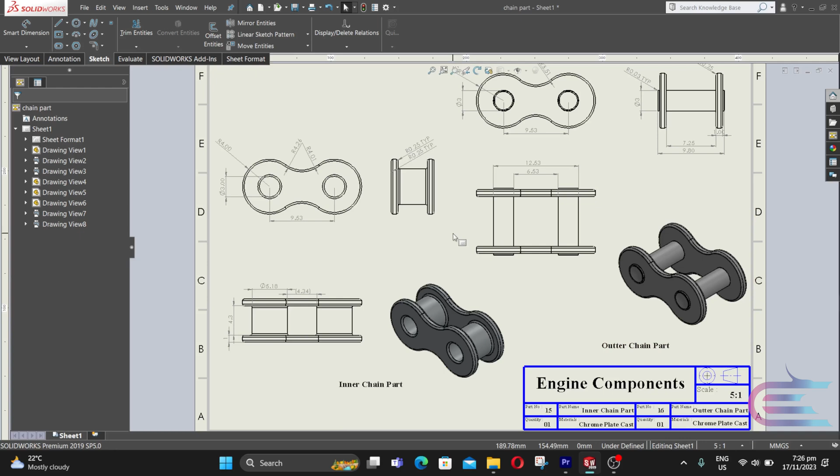In this tutorial, we are going to assemble the power transmission components.

From File, select New, then Part, then click OK. Right-click over the front plane and select Normal to. Right-click again and select Sketch.

Click on Circle. Beside the origin point, draw a circle. From the same center, draw another circle. Select Center Line, and from the origin, draw a vertical center line.

Select Smart Dimension. This diameter is 3 mm, and this one is 8 mm.

The distance from the origin to center is 4.7625 mm.

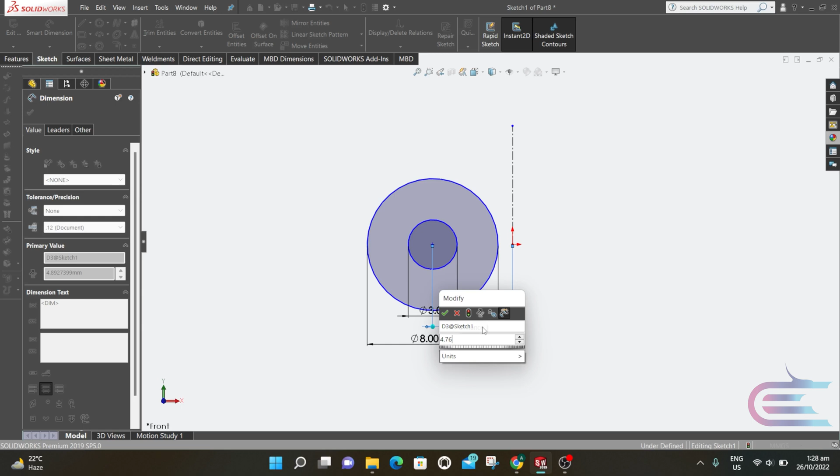Click OK. Select Mirror, select these two circles, and mirror about the center line.

Click OK. Now select Arc, connect these two circles, and place the arc as a concave form.

Press Ctrl and select the arc and this circle, then select Tangent. Click OK. Similarly for these two also.

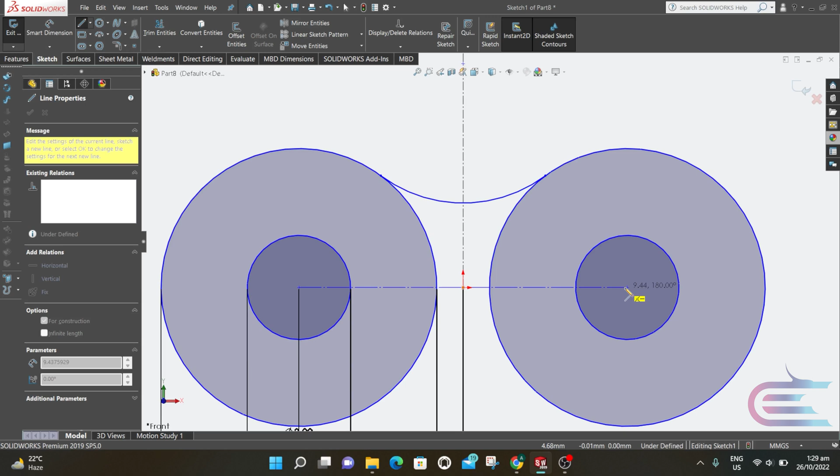Create a center line connecting the center of these two circles. Click Mirror, select this arc, then mirror about the center line. Click OK. Now trim out the extra portions.

Click OK. From Features, select Extrude. Extrude 1 mm. Then click OK.

Right click on this surface and select Sketch. Now place it Normal to.

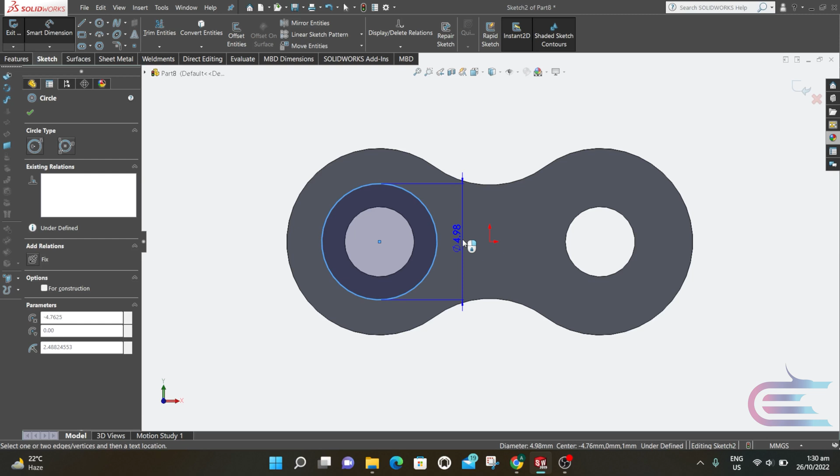Select Circle and from the center draw a circle. Select Smart Dimension, and the diameter is 5.182 mm.

Click OK. Now go to Features and Extrude. We need the hole to be throughout, so first select Convert Entities and select this edge.

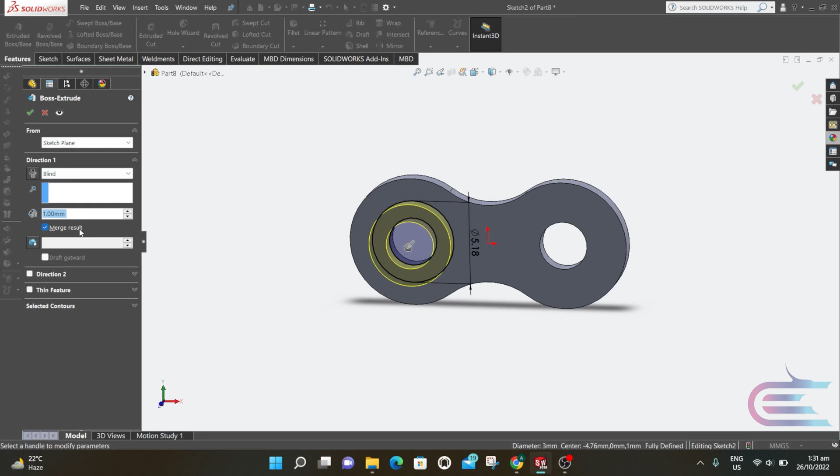Click OK. Now go to Features, select Extrude, and extrude 4.3 mm. Then click OK.

Now select Mirror and select the right plane, and select this feature. Click OK. Select Reference, then Plane. Select this surface and this surface. Then click OK.

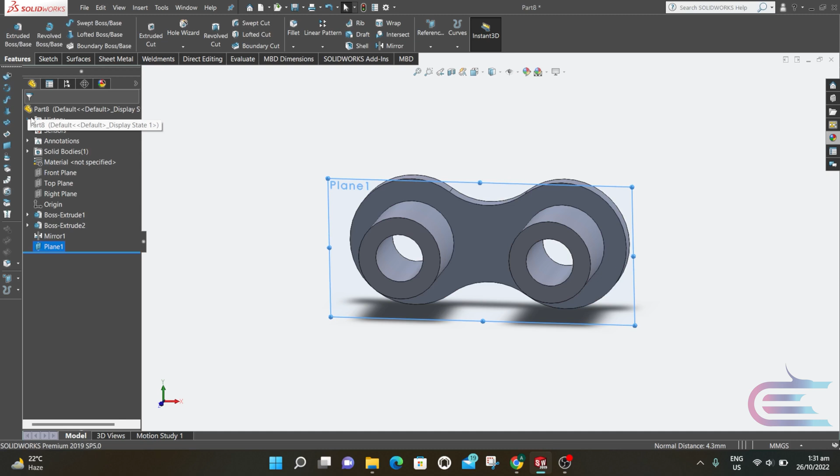Now go to Mirror, the plane is already selected. Select this feature. Then click OK.

Now we will add some fillet on the edge. First hide the plane. Click on Fillet and select this edge. Using the fillet expert window, select all of the edges.

Now the fillet radius is 0.25 mm. Then click on Apply.

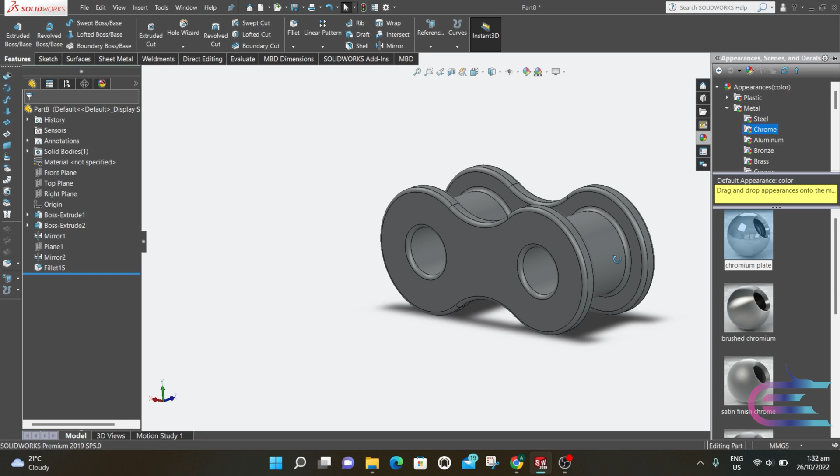Now go to Appearance and select chromium plate. From File, select Save As, chain inner part.

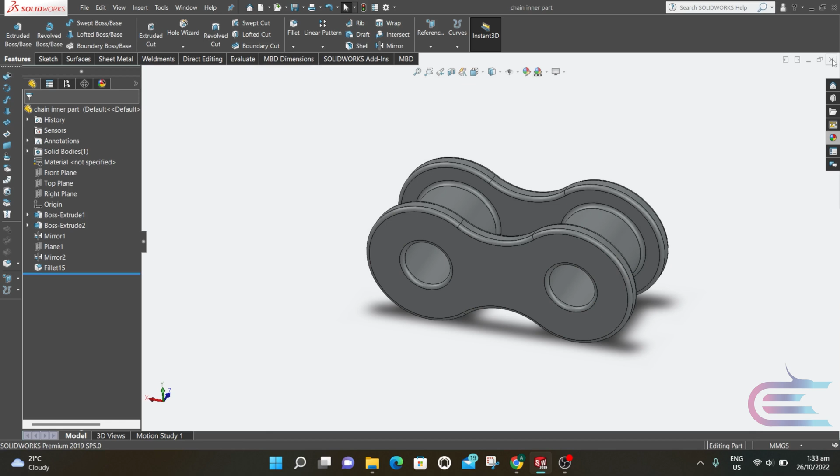Now we will create the outer part of the chain, and this is the drawing of it.

From File, select New, then Part, then click OK. Right click over the front plane and select Normal. Right click again and select Sketch, select Circle.

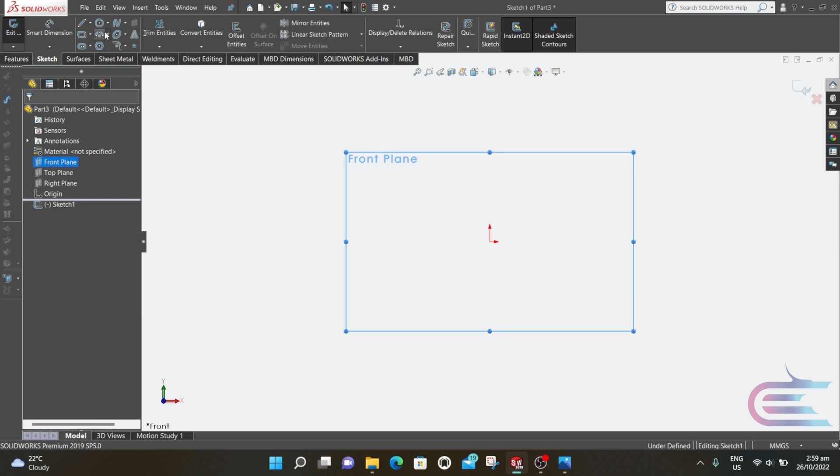Beside the origin point, draw a circle. From the same center, draw another circle. Select Center Line, connect the center of the circle and origin point, and draw a vertical center line.

Now select Smart Dimension, and the inner diameter is 3 mm, and the outer diameter is 8 mm.

And this distance is 4.7625 mm. Then click OK.

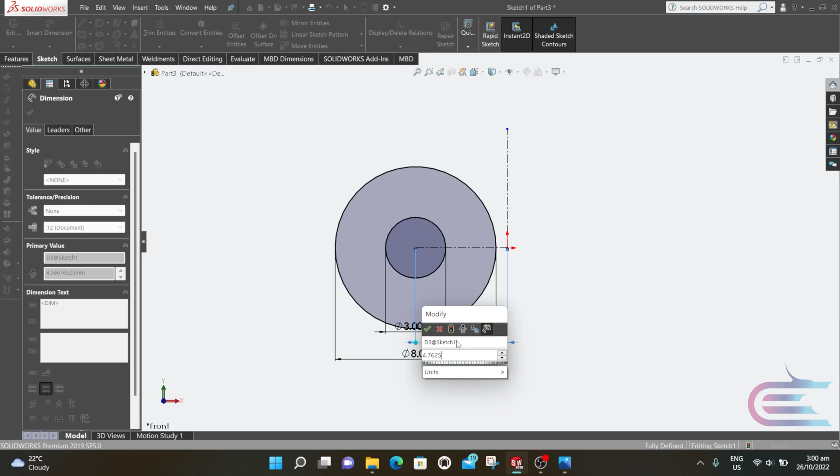Now select Mirror and select these two circles, and mirror about the center line. Then click OK.

Now select Arc and connect these two circles and make it in a concave form.

Now press Ctrl and select this circle and the arc. Then click on Tangent. Then click OK. Similarly for these two also.

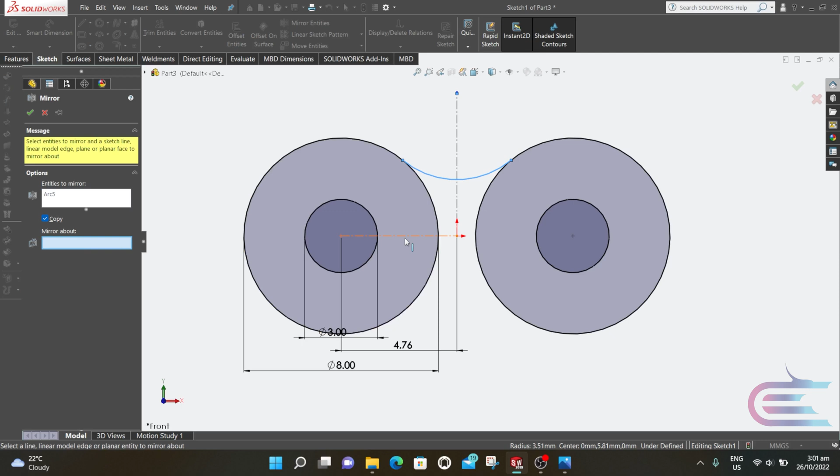Then click on Mirror and select the arc and mirror about the horizontal center line. Then click OK. Now trim out the extra portions.

Now select Features and go to Extrude. Now extrude 1 mm.

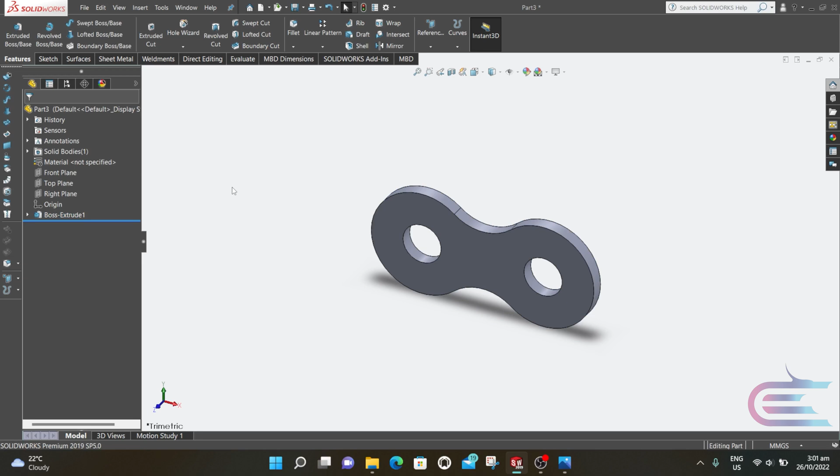Now select this back surface and click Sketch. Now select Convert Entities and select this edge. Then click OK.

Now go to Features and select Extrude. At direction 1 it's 0.25 mm, and at direction 2 it is 8.3 mm. Then click OK.

Right click over the top plane and select Sketch. Select Line and draw a vertical line, and a horizontal line.

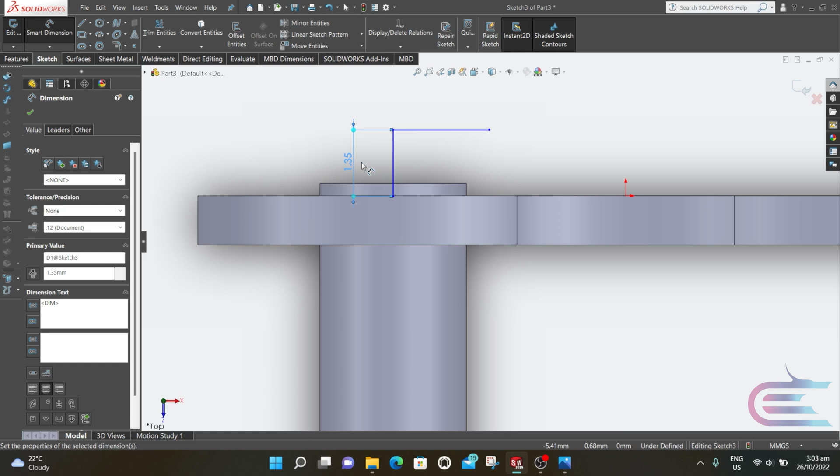Select Smart Dimension, and this one is 1.35 mm, and this one is 3.2 mm.

Now select Arc and connect the free ends, and put it just beside the outer edge. Then click OK. Now go to Features and select Revolve Cut.

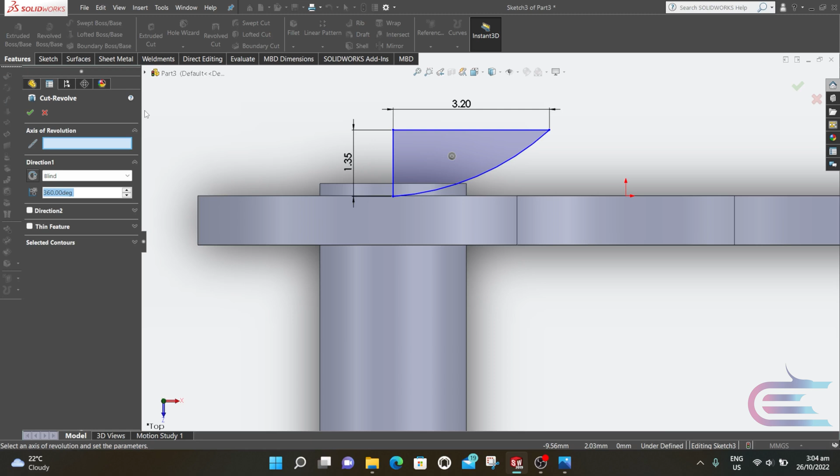Then select this axis. Then click OK.

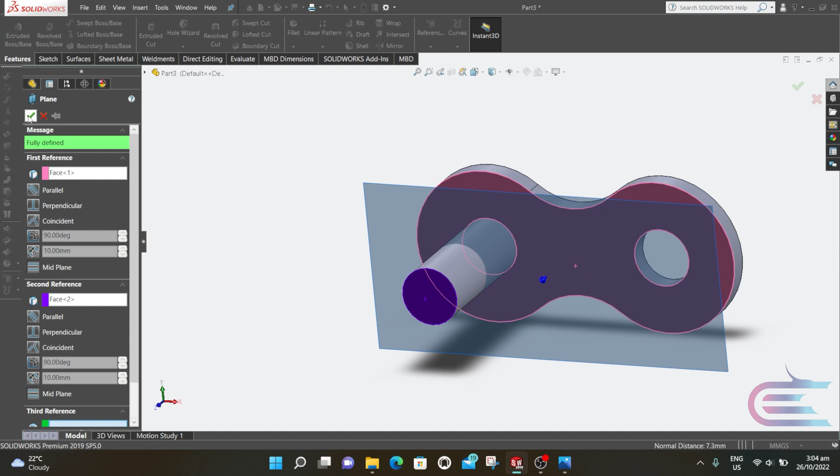Now click on Reference and select Plane. Select this surface and this surface. So a new plane is created at the middle of those. Now select Mirror.

This plane is already selected, and select that feature. Now click OK.

Now select the right plane and go to Mirror, then select this feature, then click OK. Now hide Plane 2.

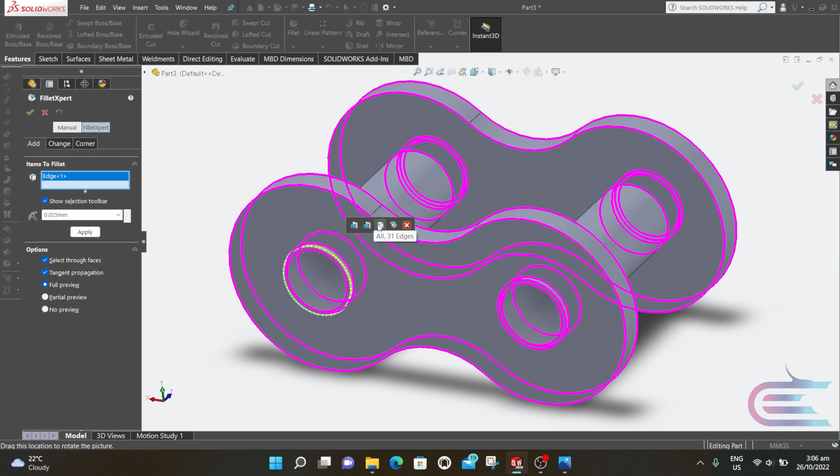Click on Fillet, select this edge. The fillet expert window will pop up, and select all of the corresponding edges. Similarly for this rod also.

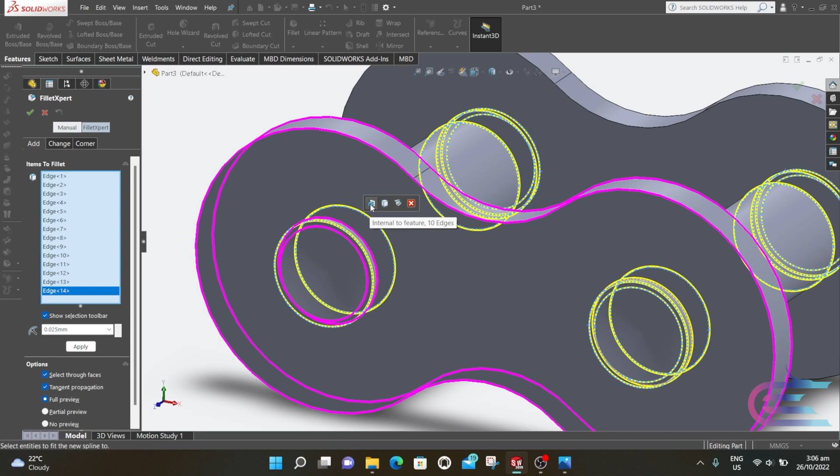This side is not selected, so press Ctrl and select these edges. Fillet radius is 0.025 millimeter, and click on Apply.

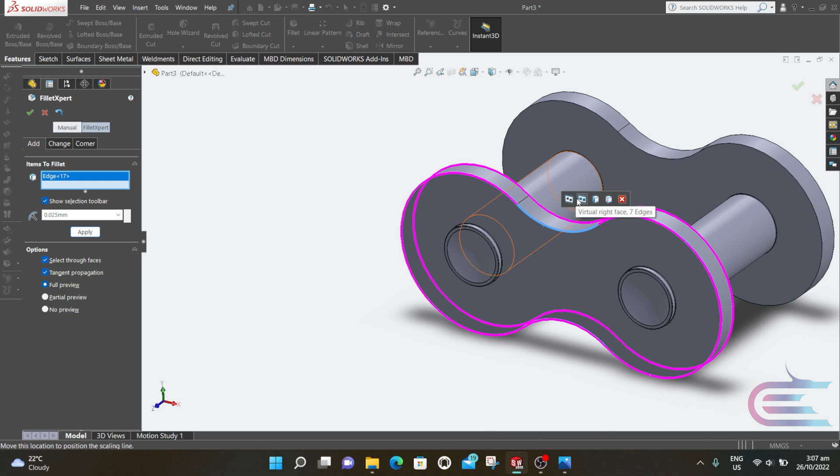Select these edges and using the fillet expert window, select all of the remaining edges, and the fillet radius is 0.025 millimeter. Then click on Apply.

Now go to Appearance, select Chrome, and go to Chrome Plate.

Now go to File and Save As chain outer part.

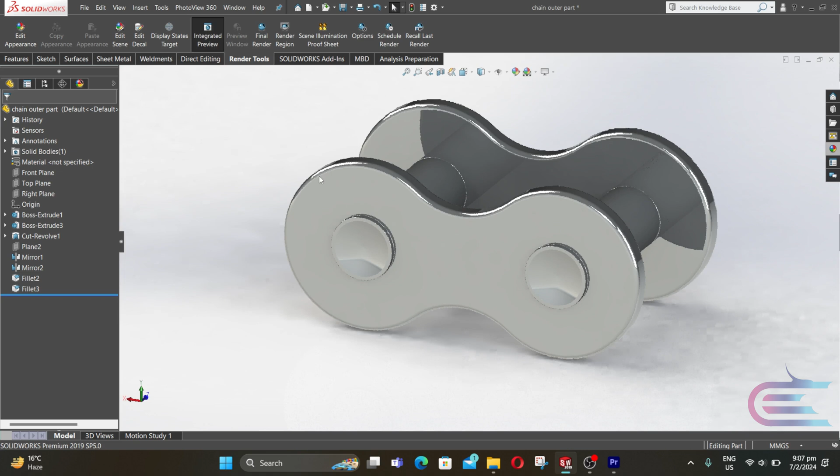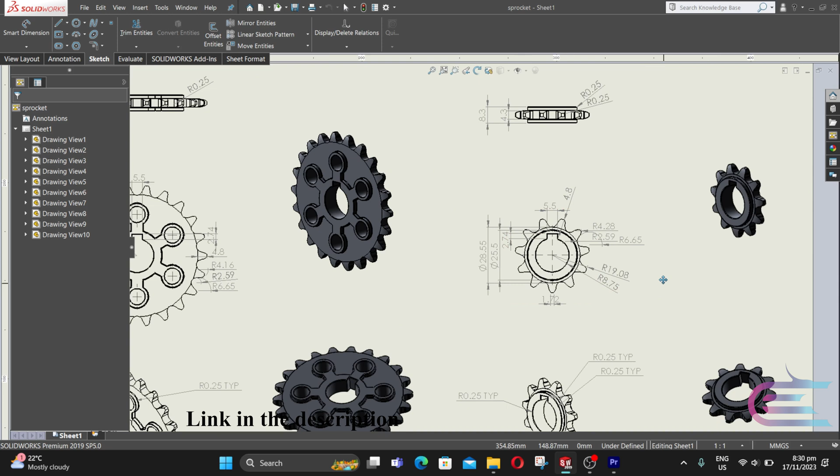Let's start. From file, select new, then part, then click OK. Go to design library, then toolbox, then add in now. Go to JIS.

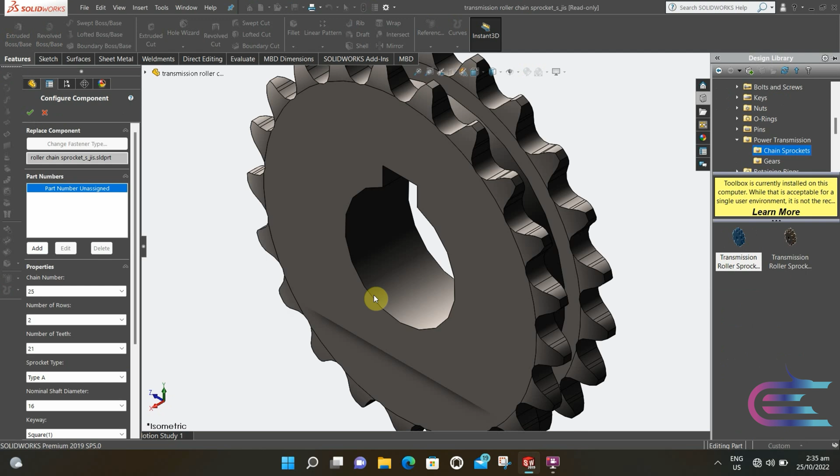Select power transmission, select chain sprocket, right click over this and select create part. Chain number is 35, number of row is 1, number of teeth is 22, then nominal shaft diameter is 17 and the keyway is square 1. Then click OK.

The sprocket will be created in another tab. Go on it, right click over this plane and select sketch. Select normal to, then select circle. From center, draw a circle. Draw another circle from the center and click on for construction.

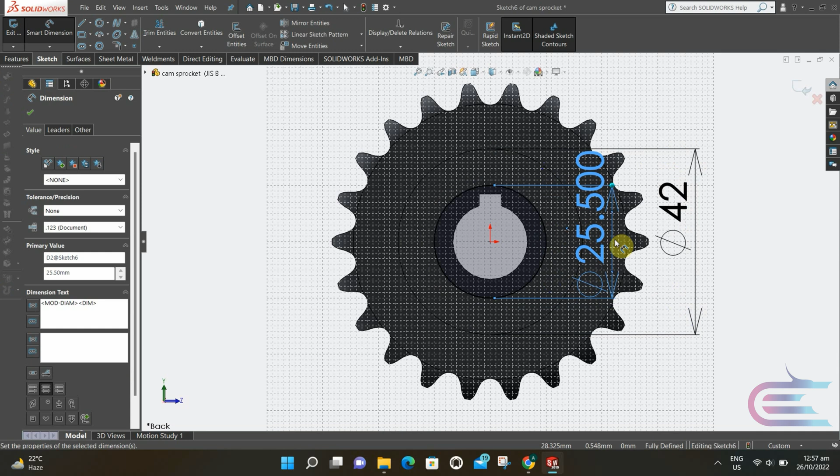The outer circle diameter is 42 millimeter and the inner circle diameter is 25.5 millimeter. Now select circle again and draw a circle at the bottom point. The diameter of it is 8 millimeter. Draw another circle from the same center. The diameter is 11.5 millimeter.

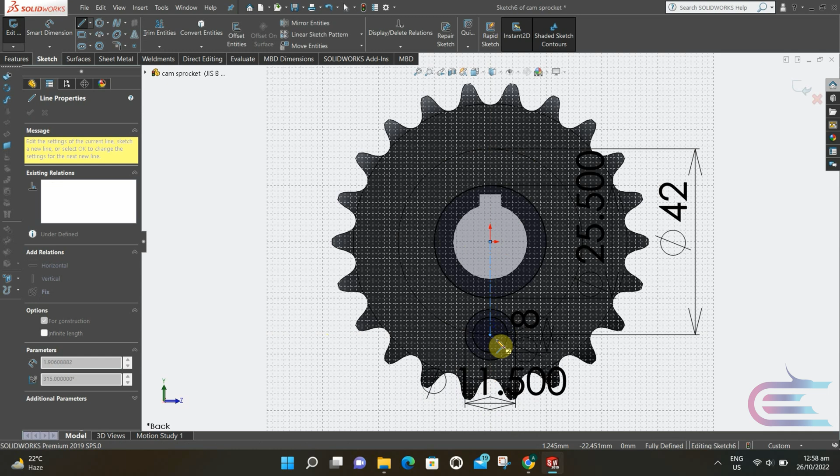Now select center line and connect these centers. Select line and connect the outer circles. The distance from these two lines is 3 millimeter. Then click OK. Select mirror, then select the line and mirror about the center line. Then click OK.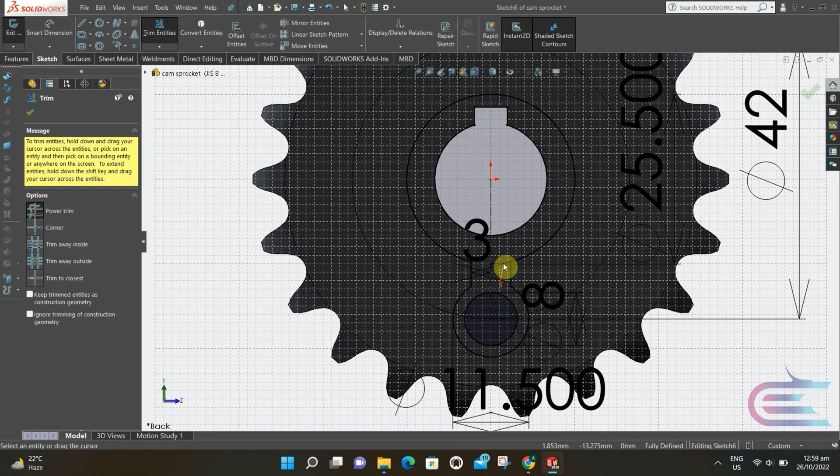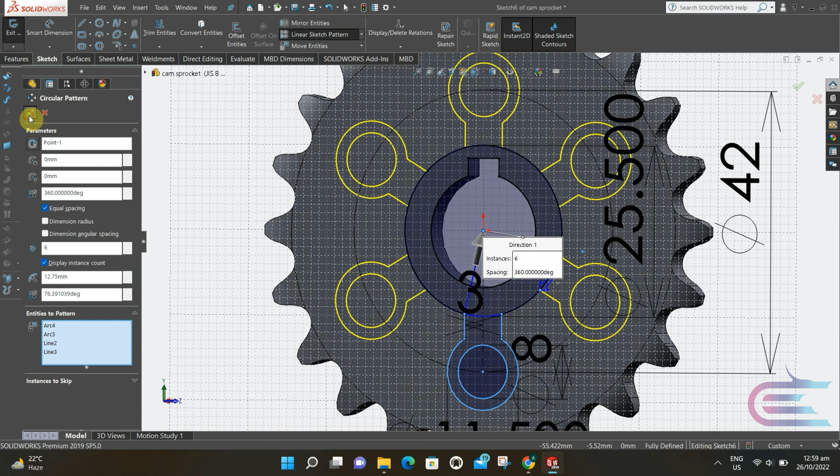Click on convert entities and select the inner edge. Then click OK. Select trim entities and trim the extra portions between the joints. Select circular sketch pattern and select the circles as entities and the lines also. The number of pattern will be 6. Then click OK. Now trim the extra portions between the joint. Then click OK.

Select feature and select extrude cut. Expand selected contours and select the circles only. Then click OK.

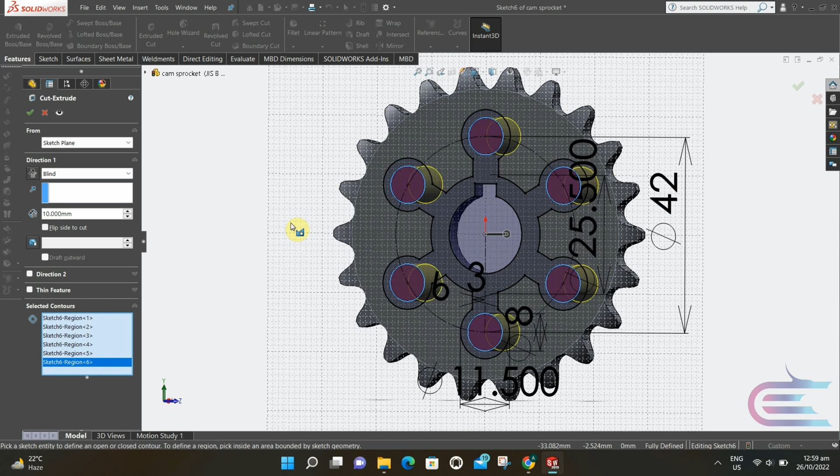Now select extrude, go to the cut feature, then select the sketch. Click on merge result and the extrude will be 2 mm. Then click OK.

The similar feature will be on the opposite side also. From reference, select plane and select this surface and this surface. So in the middle of these two planes, a new plane will be created. Now select mirror and select the new plane to mirror about and select the feature. So the feature will mirror about the mid plane.

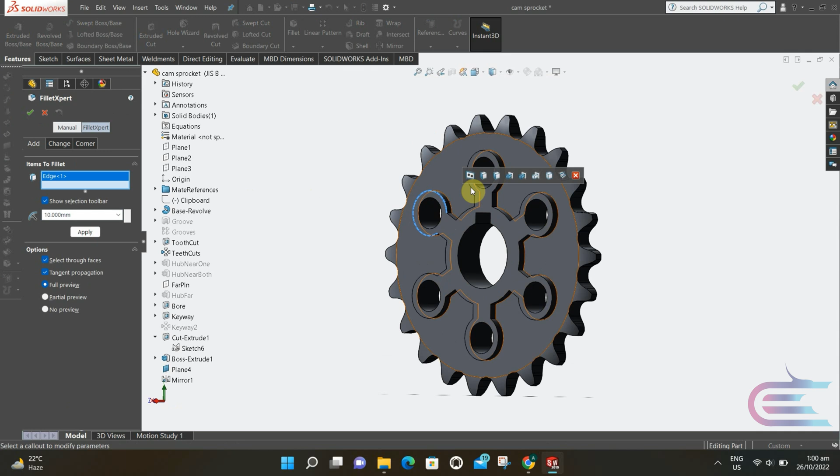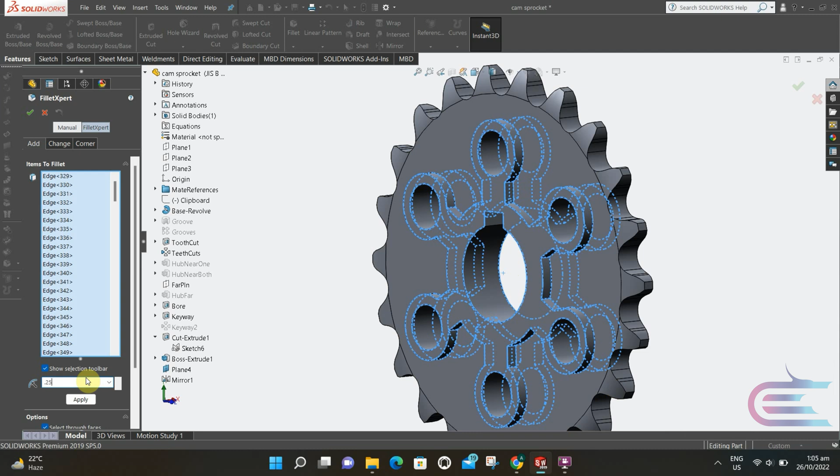Now select the edge and select fillet. Using fillet expert, select all of the extruded edges. Similarly for this side also. Now fillet radius will be 0.25 mm. Then click OK.

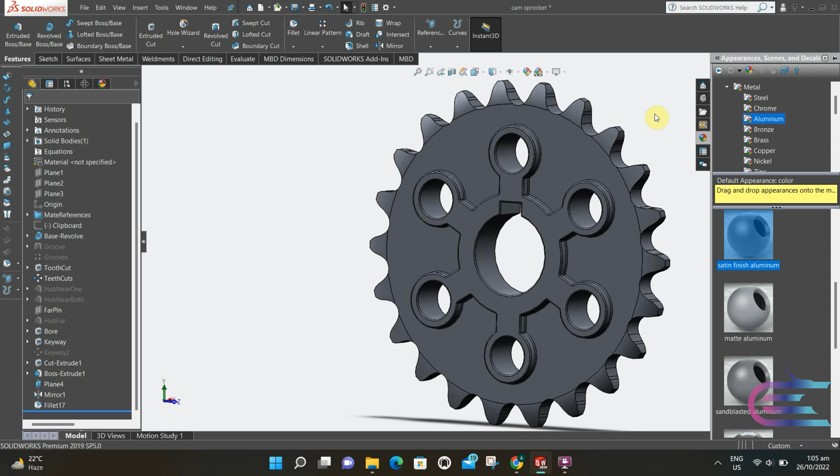Select appearance, go to metal, select aluminum and select satin finish aluminum. Now from file, select save as and save as cam sprocket.

Now let's draw the crank sprocket in almost similar way. From design library, select toolbox, then add in, select JIS, select power transmission, then chain sprocket, right click over this and select create part.

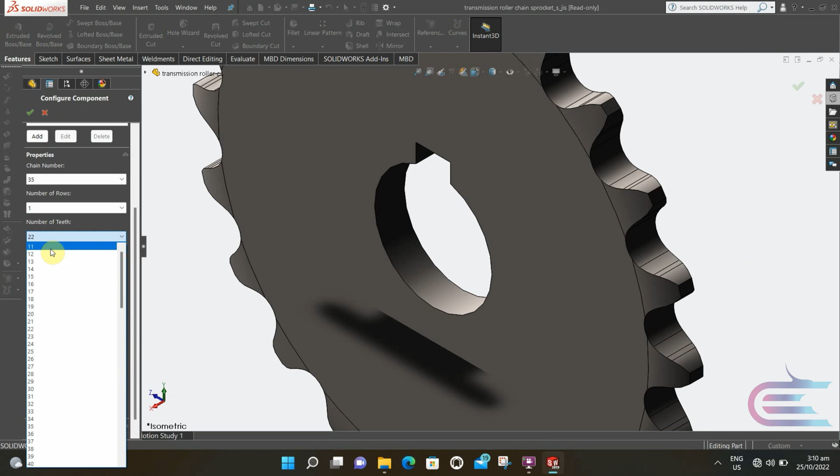The chain number is 35, similar to the previous one. The number of teeth will be half of that, that means 11. And the rest of the items will be similar. It is opened in the new tab.

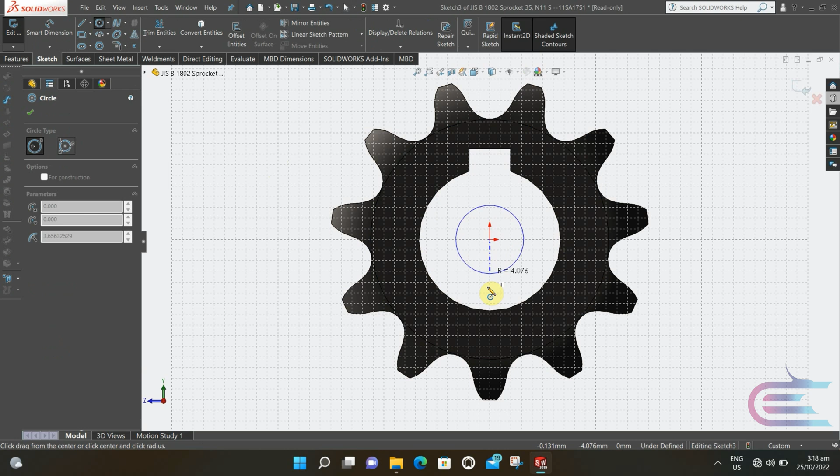Right click over this plane and select sketch. Now select normal to. Select circle and draw a circle from the origin. Now type the radius 12.75 mm. Then click OK.

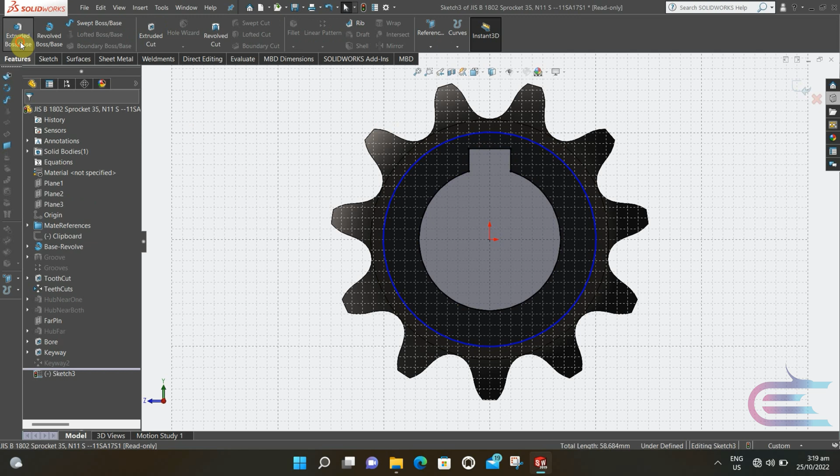Select convert entities and select the inner edges. Select feature and then extrude. Extrude 2 mm and click on merge result. Then click OK.

From reference, select plane and select this plane and the opposite one. So a new plane will be created in the middle of this. Select mirror and the plane is selected already and select the extruded feature. So on the opposite side, a similar feature will be created.

Now select this edge and using FilletXpert, select all of these 3 edges, and similar for this side also. Fillet radius is 0.25 millimeter and click OK.

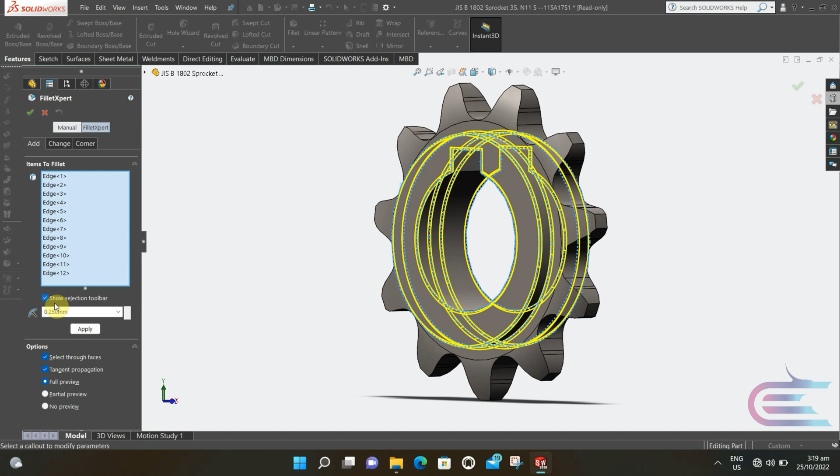From appearance, go to metal, then aluminum, select satin finished aluminum. Now go to file and save as crank sprocket.

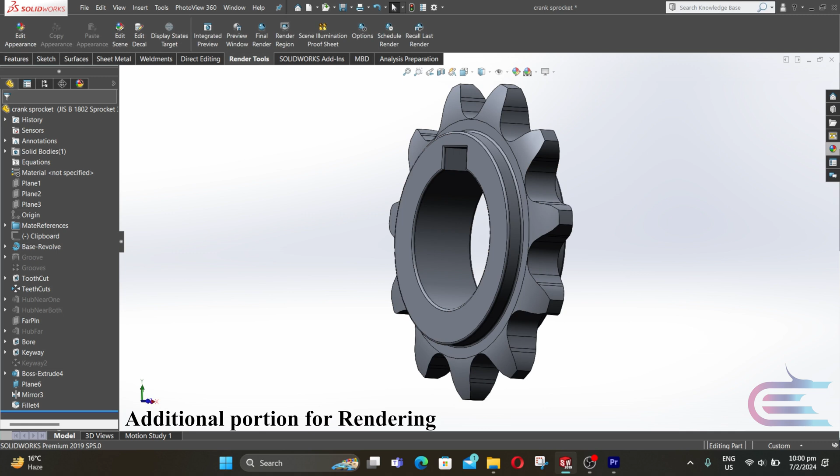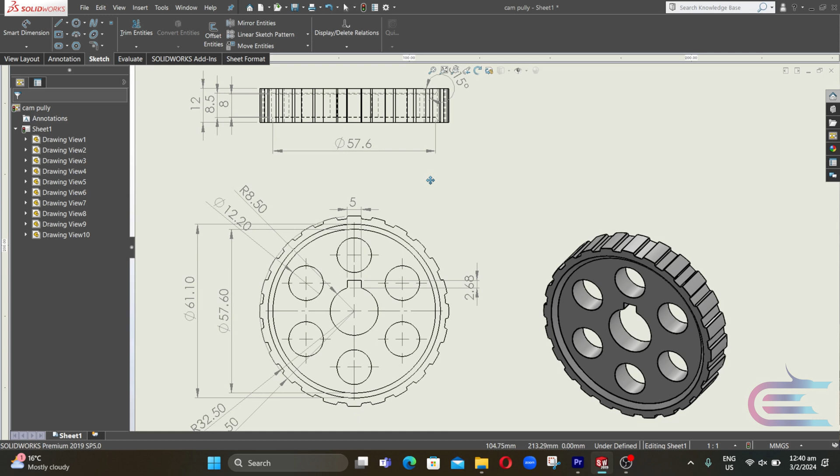Now we are going to assemble the alternative power transmission component, which is pulley and belt drive. You can use either sprocket and chain drive or pulley and belt drive as you wish. Starting from the crank pulley, from file, select new, then part, then click OK.

Right click over the front plane and select normal to. Right click again and select sketch. Select circle, draw a circle from the origin point. Draw another circle from origin.

Select smart dimension. The outer circle is 33.5 millimeter and the inner circle is 32.5 millimeter.

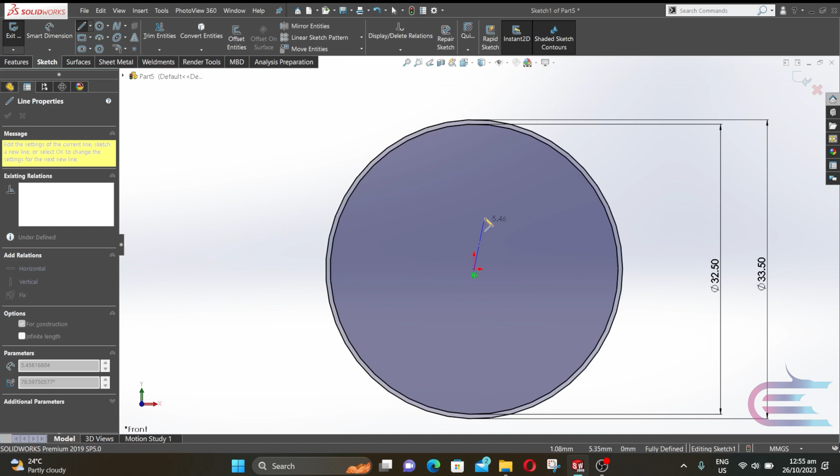Now select center line. Draw a vertical center line from the origin to the outer circle. Now select line and draw a horizontal line from the center line to the inner circle. And then draw an inclined line to the outer circle.

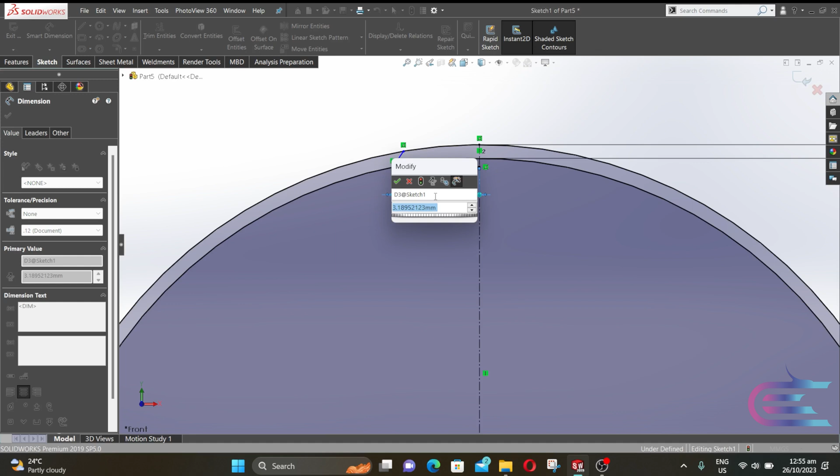Now select smart dimension. The horizontal line is 2.7 millimeter and the angle of inclination is 72.4 degrees. Now click OK. Select mirror entities and select the inclined line and mirror about the center line. Then click OK. Now select trim entities and trim the extra portions.

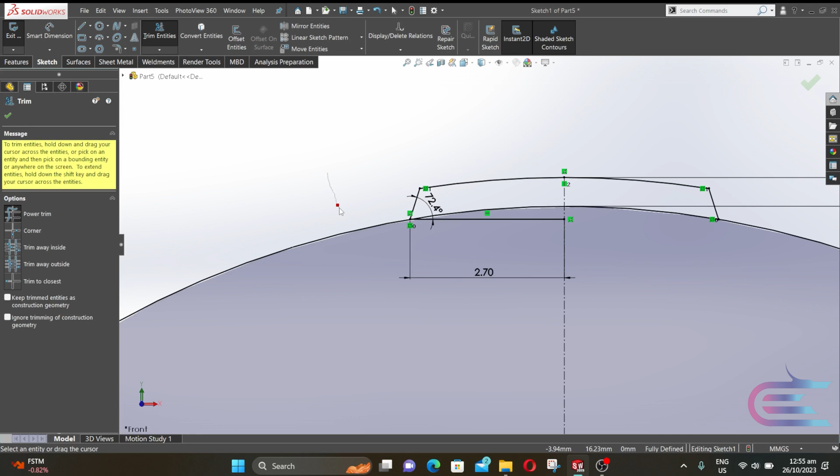Now click OK. Go to features and select extrude. Extrude 8 millimeter to the mid plane. Then click OK.

Expand linear pattern and select circular pattern. Now select this face and click on direction, and select this circular profile as direction. The number of pattern is 12. Click OK.

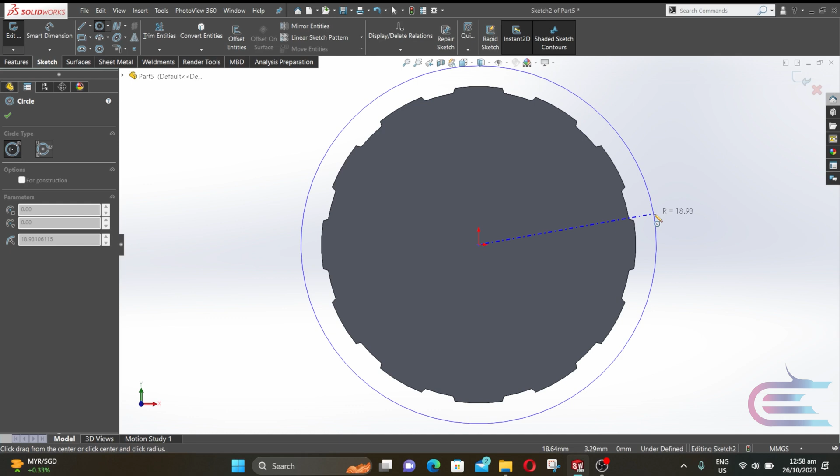Right click over this face and select normal to. Right click again and select sketch. Select circle and draw a circle from the origin, then draw another circle from the origin. Select smart dimension. The outer circle is 35.5 millimeter, the inner one is 25.75 millimeter.

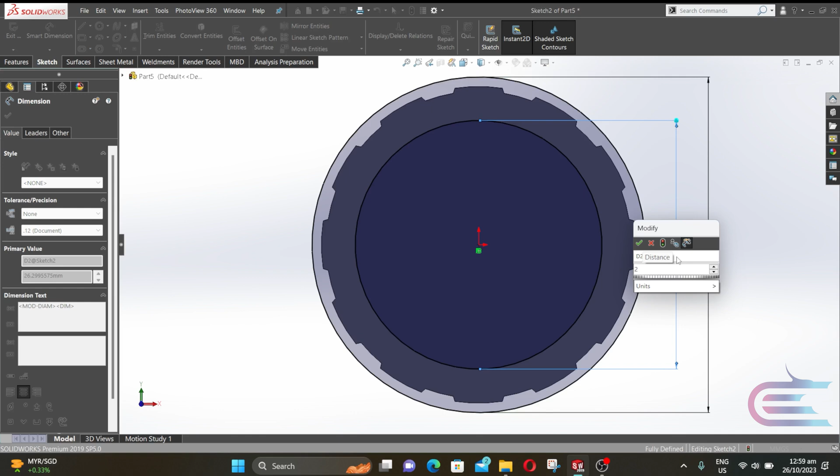Now go to features and select extrude boss base. Extrude 2 millimeter. Click on merge result and click OK.

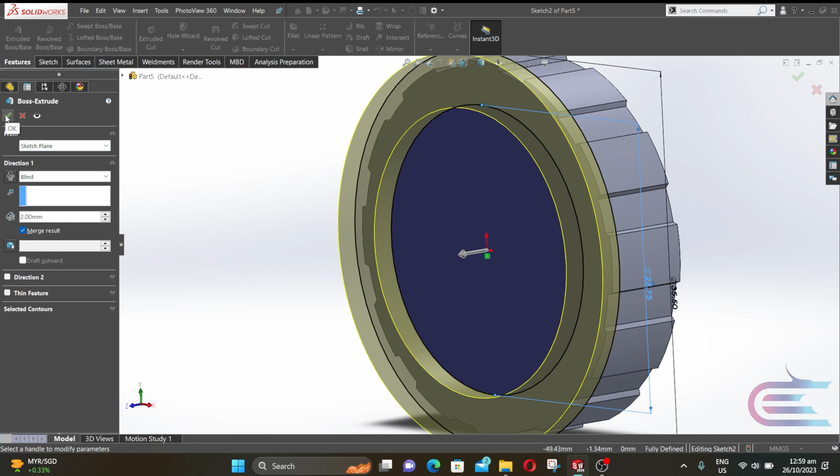Click on mirror. Mirror about the front plane and select this feature, then click OK.

Expand fillet and select chamfer. Select this edge and this edge. The parameter is 3 millimeter and this is 30 degree. Then click OK.

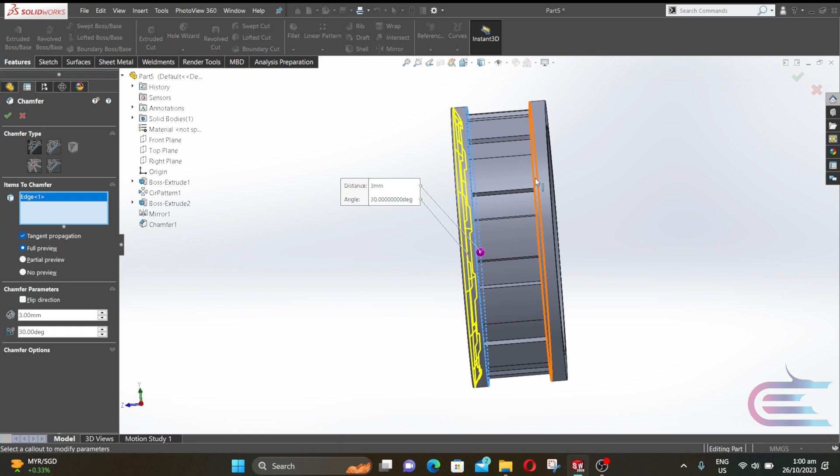Now select this edge and this edge. The parameter is 1 millimeter and 50 degree. Now click OK.

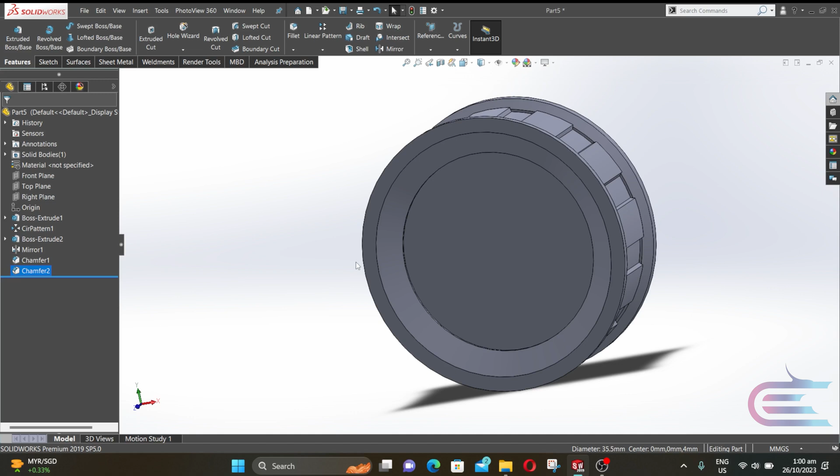Right click over this face and select normal to. Right click again and select sketch. Select circle, draw a circle from the origin. Select center line and draw a vertical center line from the origin point. Now select line, draw a vertical line and then horizontal line to the center line.

Select smart dimension. This circle is 17 millimeter and this line is 2.675 millimeter. This one is 2.5 millimeter.

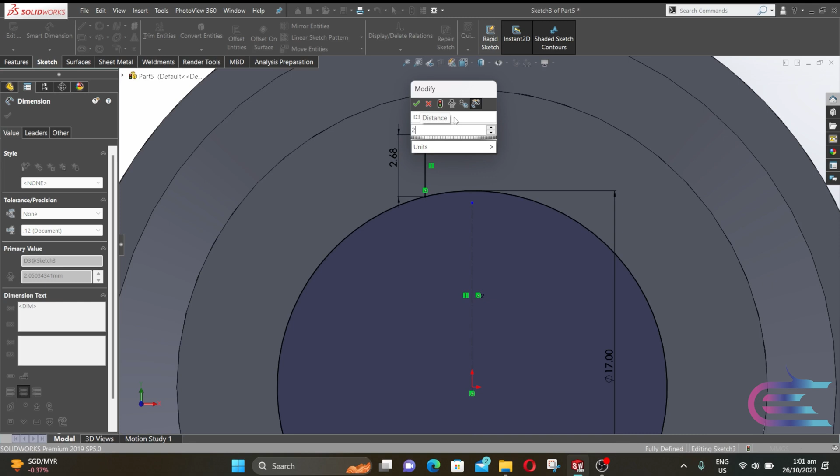Then click OK. Select mirror. Select this line and this line, then mirror about the center line. Then click OK.

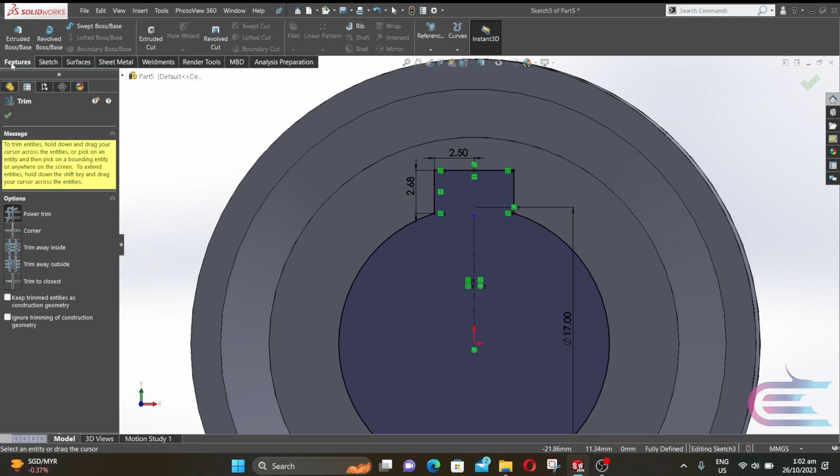Select trim entities and trim out the extra portion. Go to features, select extrude cut, and select through all. Then click OK.

Go to appearance, expand metal, click on aluminum and select satin finish aluminum. From file, select save as. Now save as crank pulley.

Now we are going to design the cam sprocket.

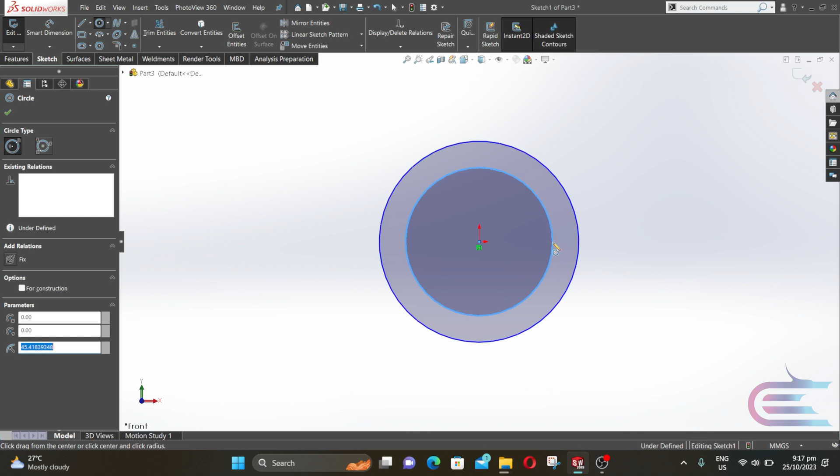Right click over the front plane and select normal to. Right click again and select sketch. Select circle and draw a circle from the origin point, then draw another circle. Select smart dimension. The outer circle is 67 millimeter and the inner circle is 65 millimeter.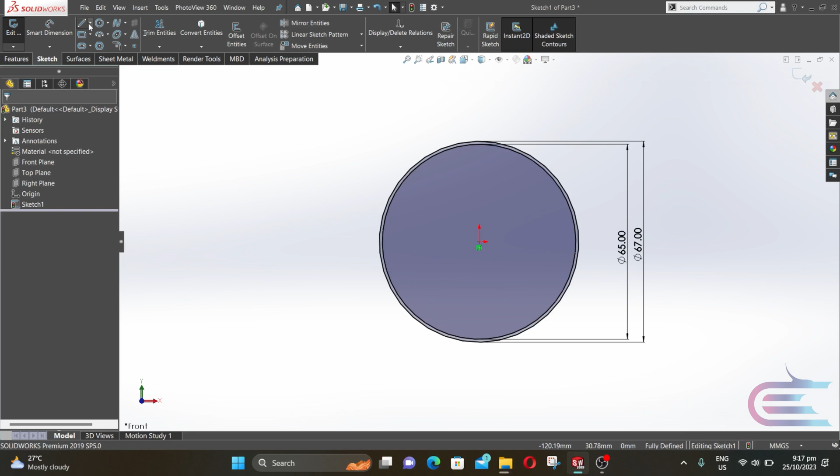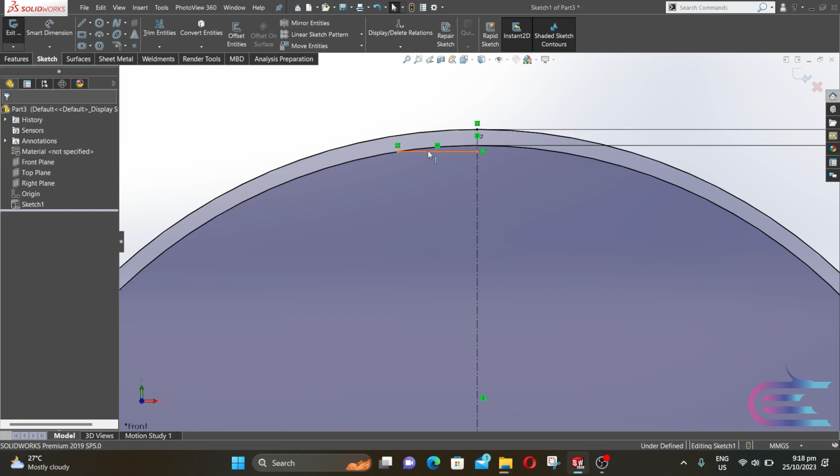Now click OK. Select center line and draw a center line from the origin to the outer circle. Now select line, draw a horizontal line from the vertical center line to the inner circle. Select smart dimension, and this line is 2.7 millimeter.

Now draw an inclined line from this point to the outer circle, and the angle is 72.4 degree. This line will be construction line. So select this line and click on construction, then click OK.

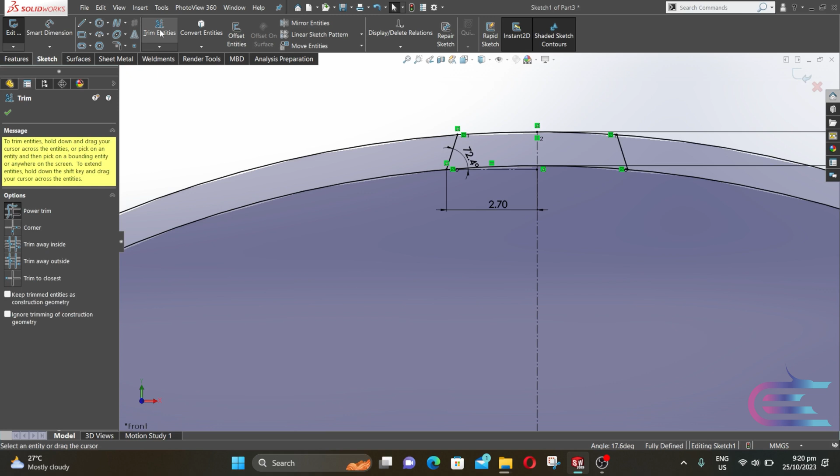Click on mirror and select the inclined line, and mirror about the center line. Now click on trim entities and trim the extra portions. Then click OK.

Now go to features, click on extrude. Extrude 12 millimeter to the midplane.

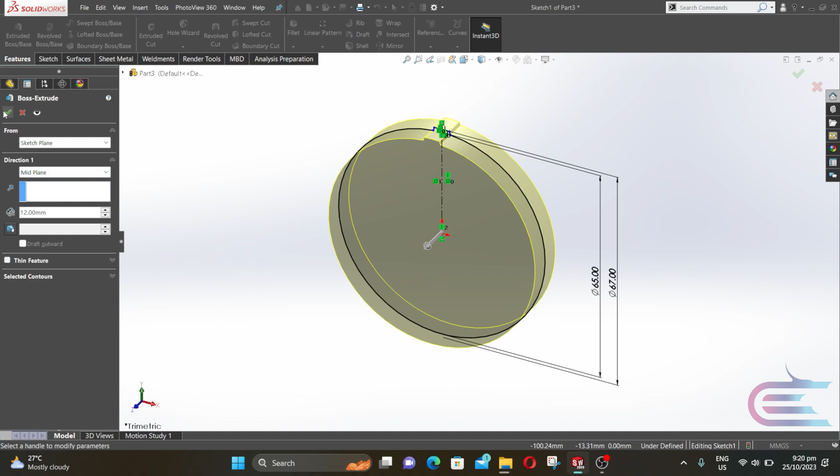Expand linear pattern and select circular pattern. Select this face and the direction is this edge. The parameter is 24. Then click OK.

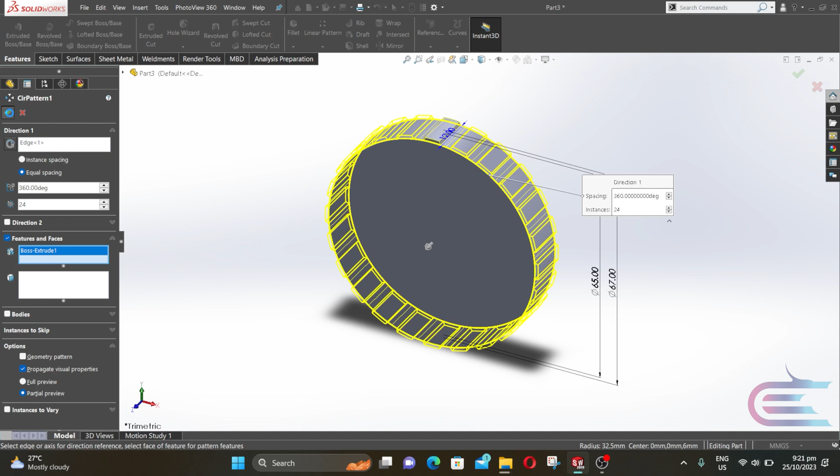Now right click over this plane and select normal to. Right click again and select sketch. Select circle, draw a circle from the origin. Click on for construction. Now draw another circle at the top of the previous circle. Select smart dimension. The larger circle is 39.4 millimeter and the smaller circle is 12.2 millimeter. Then click OK.

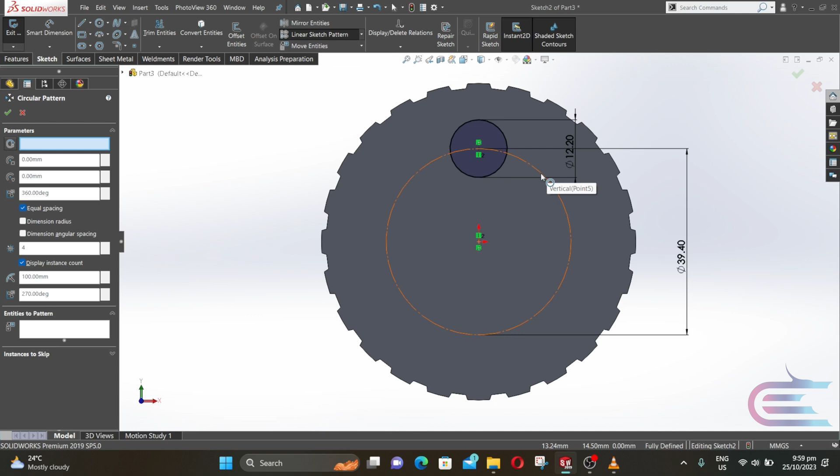Expand linear sketch pattern and select circular sketch pattern. Select the larger circle as direction and the smaller circle as entity. Number of entity is 6. Then click OK.

Now draw a circle at the middle. Select smart dimension and the diameter of the middle circle is 17 millimeter.

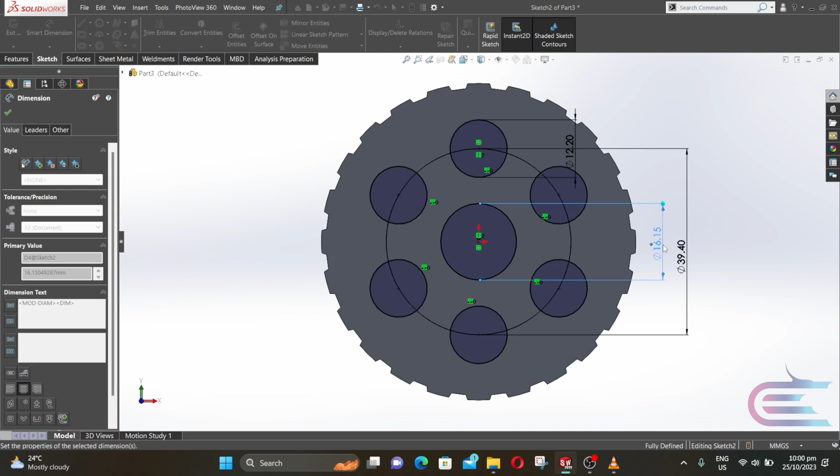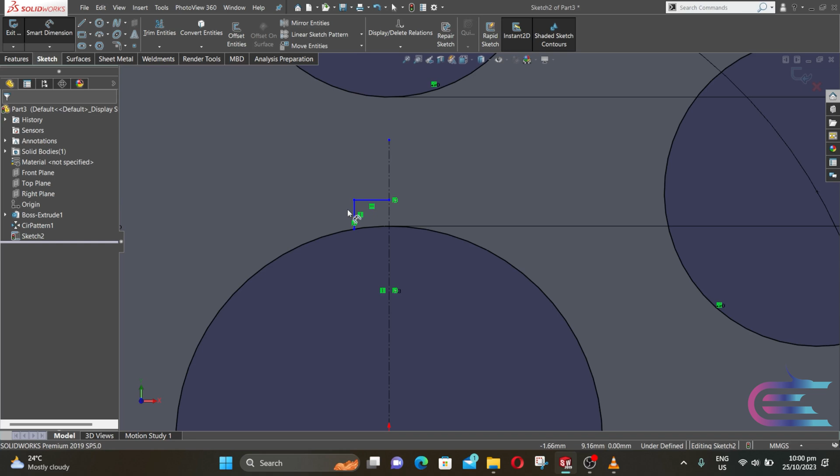Select center line and draw a center line vertically to the origin point. Now select line, draw a vertical line and horizontal line as a pitch slot. Select smart dimension, and the vertical line is 2.675 millimeter, and the horizontal line is 2.5 millimeter.

Click on mirror entities. Select both of these lines, mirror about the center line. Then click OK. Then select trim entities and cut out the extra portions. Then click OK.

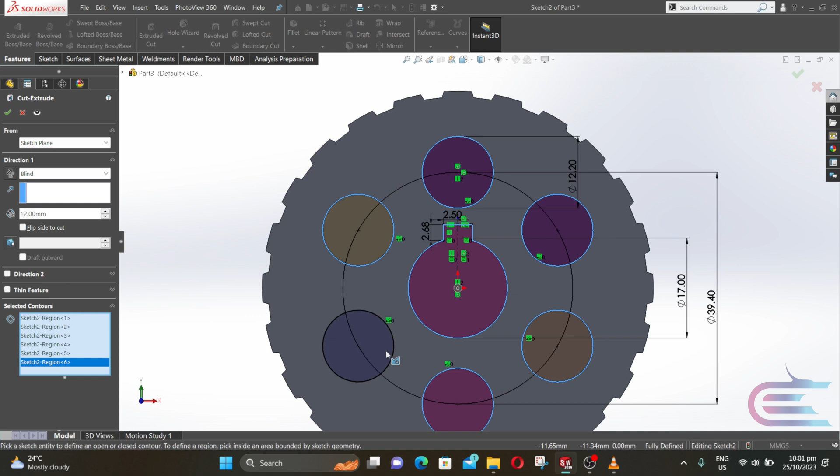From features, select extrude cut. Select all of the circle, and cut through everything. Then click OK.

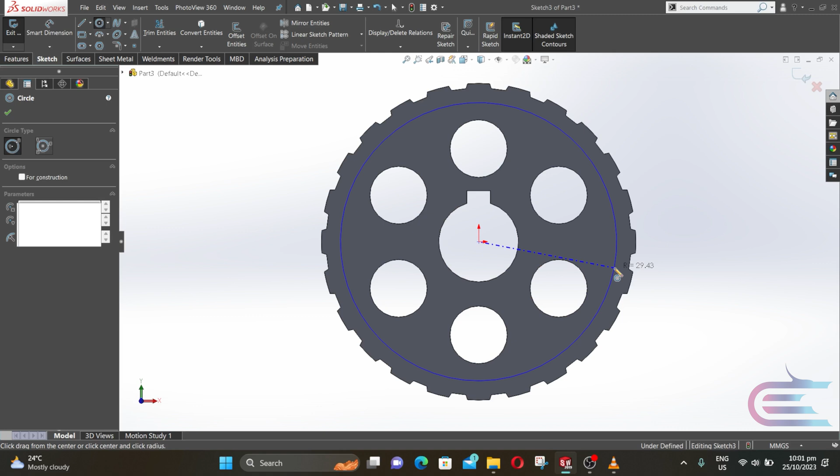Right click over this face and select normal to. Right click again and select sketch. Select circle and draw a circle from the origin. Select smart dimension, and the circle is 57.6 millimeter.

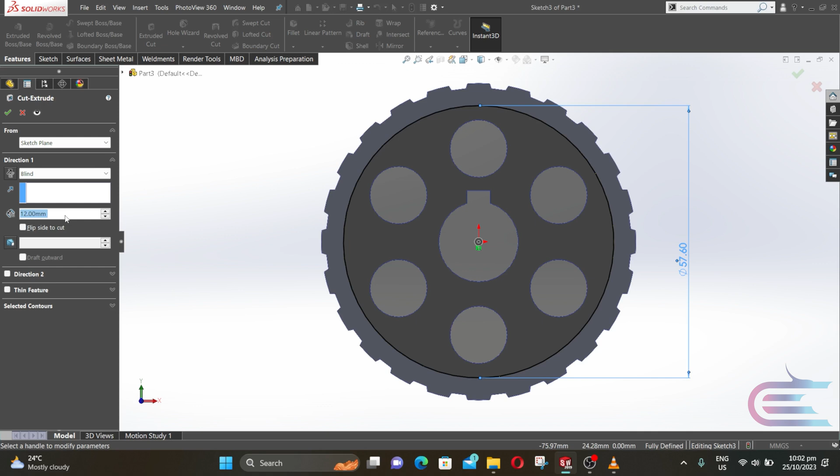Go to features and select extrude cut. Cut 2 millimeter. Then click OK.

Select mirror and mirror about the front plane. Then select this feature. Then click OK.

Now from fillet, select chamfer and select this edge and this edge. Parameter is 1.75 millimeter and 45 degrees. Then click OK.

Go to appearance. Expand metal, click on aluminum and select satin finish aluminum. Now save as cam pulley.